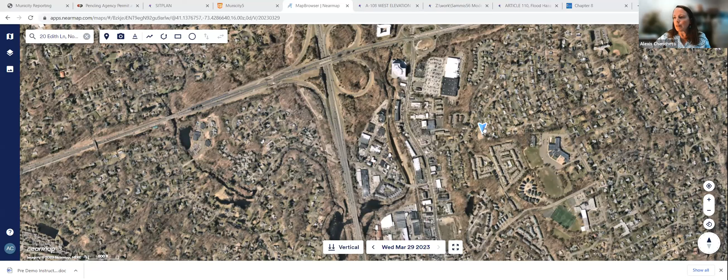I'll just zoom in. So this is the end of Edith Lane at the top of the screen. There is a water course at the bottom of the screen. This is Winnapock condominiums off of Aiken Street. And so this is the property in question here. And the work that they're seeking to correct is in the rear, and it is within the upland review area of the wetland and water course. And with that, I don't know.

So I know that Mr. Pinedo, you're here, and the engineer Wayne Devanzo is here. So if either of you want to describe the proposal, and if you need me to, I can share your submitted site plan to everyone as well. Just let me know.

Mr. Pinedo, would you like me to share? Can I share my screen? I have the drawing. Yes, please do. Can everybody see that? Yes, okay, yes, okay.

So this is the site, and this is the area that had been filled. And if you look closely, you can see there's really 3 contours on there. The reddish contours are the contours that are out there today, and the lighter ones are the pre-existing contours. And then the black ones with the boxes are what's being proposed. So basically this site was filled pretty significantly in this area and down towards the wetlands. And the proposed grading is seeking to cut this back and get it somewhat closer to what was existing. And again, the black lines are the proposed grading.

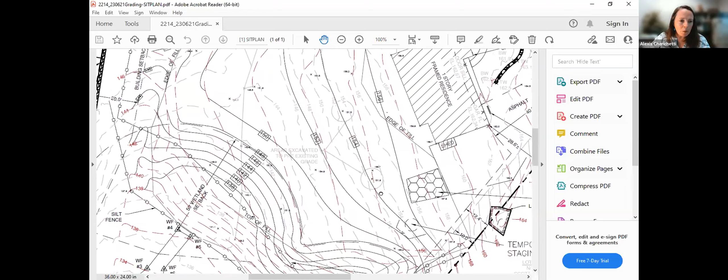Can you just point out the location of the wetlands relative to what you're talking about? Sure. The wetlands are, if you can see the cursor, in this area, and if you can see the flags, the triangles. The grading is in this upper area. And that's the setback, roughly where the steeper section begins.

That's basically it. Sorry, one more time: the gray lines are what would have existed previously. These grayish lines are the original existing grades. These more reddish ones are what's there today. And this is what's proposed.

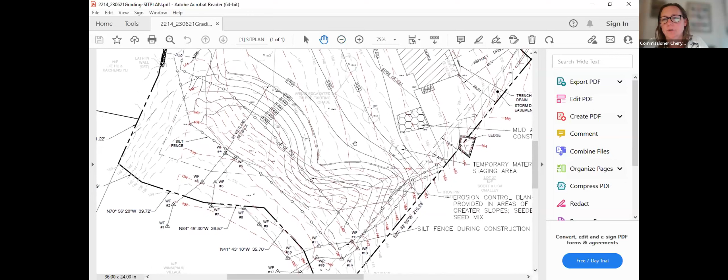So, would you be able to give us a little background? I don't think Commissioner Breslin was here last time this was presented. Were you? I was not. Okay, so I think if we could get a little bit of an overview of how we ended up here, that would be really helpful for the commissioners to remind them and also to introduce the project. Thank you, I appreciate that.

Okay, so maybe I'll go through some photographs real quick. Would that help? And then is that what you're talking about?

I think you might be remembering I did issue an enforcement order, and that triggered the need for a show cause hearing. So I went through quite a few aerial photographs and site photographs of the site, and the agency did uphold that order, which is why the applicant is here today.

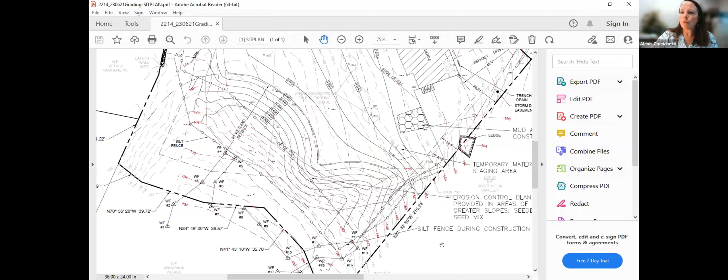But that's okay, if that's... well, it's only me. No, we're good, we'll go quick. Let's see, I'm just thinking about the easiest way to share stuff. If I share this.

Okay, so I'll start with some aerial photographs of the site, and then I'll show you some site photographs so you get a better idea of the lay of the land. As for any application, I strongly recommend you take the time to stop by, knock on the door, announce who you are, and have a look in person, because even the best maps, it's really hard to figure out what's going on without being there.

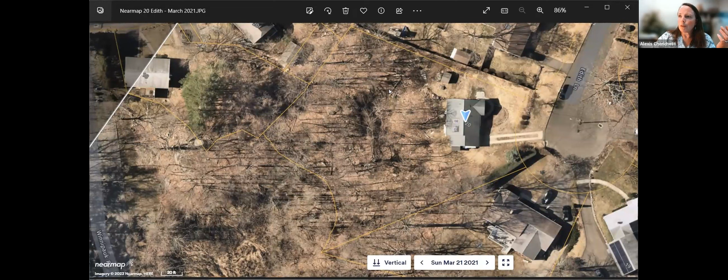This is what it looked like in 2021. It looks more different than it actually was, but there were still some trees and no grading had occurred. Then in the spring of 2022, more trees had been cleared. And this is what it looked like earlier this year, in March 2023, after the area of filling.

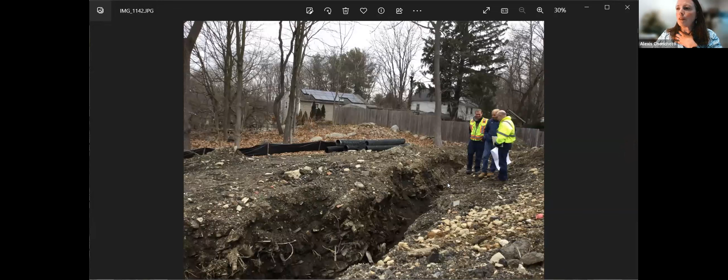This is the trench that you can see the shadow of in the aerial photo. This is the same trench looking down towards the ponded area on the Winnapaw condo property. And then the pink flags are some of the wetland flags, here, here, here, here.

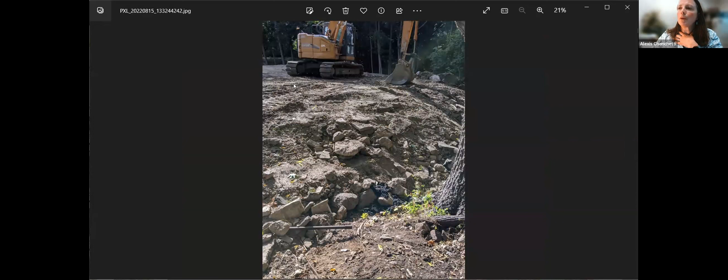Well, let's see, I think I have — so this was during the original notice of violation that was sent. This is the conditions that we found. This is the type of material that's in the fill that was brought in.

Let's see, I have some better photos somewhere. So again, this is the wetland, the ponded area, and on the side of the fill slope.

And so one of the issues is, in addition to needing an inland wetland permit, a fill and excavation permit is also required, and that's administered through our Public Works Department. The fill and excavation permit defines suitable fill versus unsuitable fill.

Unsuitable fill includes stuff like plastic, construction debris, wood, asphalt, and other materials. Let me flip through these. Here's a good one. The house is off the screen to the right, and you can get a feel for the extent of fill material. As I was saying before, a fair amount of the fill material is unsuitable.

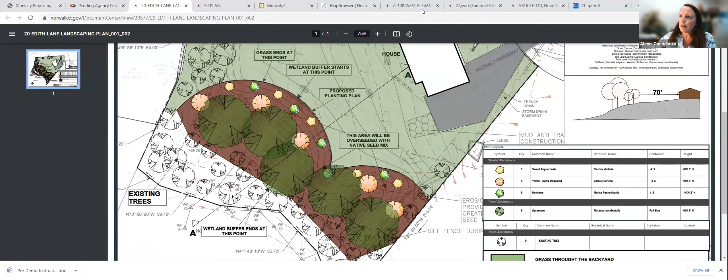I think that's all that I know. Maybe I don't know if Raul or Wayne have any ballpark estimates for the duration, the time it might take to remove the material, and how long it would take if the commission were to approve your application today—which they can't, but as an example—how long would it take to complete all the screening and grading activity you propose, so you could do the planting?

I would guess that might be, with the screening and everything, maybe a 3-week process, possibly.

I have a question just in looking at the grading. If I understand correctly, the grading being proposed—I don't know what the percentage is—so what's the percentage grade being asked to be put into the upland review area? Because that's a significant change from what the grading was existing. I'm just trying to understand. It looks like it goes from 148 to 138, previously it was not as steep in the upland review area.

Yeah, it's right, it's 2-to-1, that's a 2-to-1 slope in that steep area. That's proposed, the 148 to 138. So a 2-to-1 slope, meaning for every 2 feet of horizontal, there'd be a 1 foot increase in grade. Correct, yes, I'm sorry, yes, that's right.

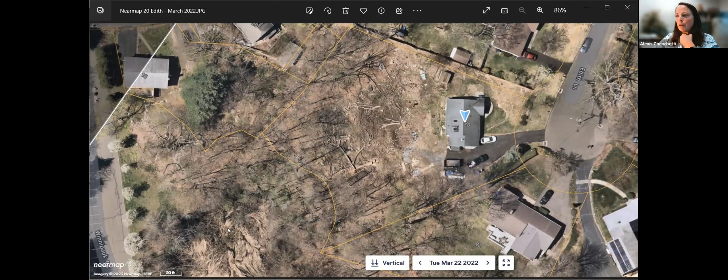But this area is kind of a relatively high point. This whole area here is a bit of a valley. So this point here is higher than here, and it's similar to here, if that makes sense. So there's a valley that runs through the subject property. And then the valley continues with a higher elevation here, but a low point here, and it's in that low point just south of the property where the wetland is.

Did that help at all, by pointing and clicking? In terms of the grading that's proposed, is it still a valley, or how does that relate to the elevations around? So I'll share, because I'm just thinking about how the underground water is going to run.

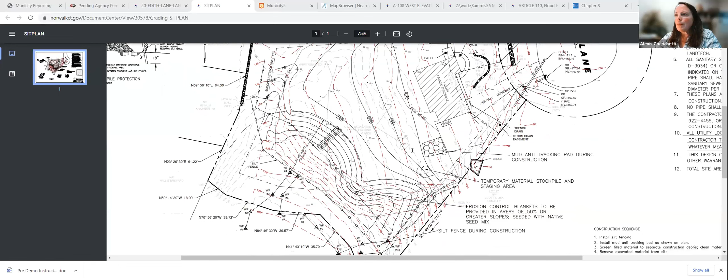Let's see, I have to fit it all on a screen.

If we start with the light gray contour lines, when you have a kind of a V, or this is more of a U, that's a valley. So if you were to walk along this elevation, you wouldn't go up or down, you'd stay at that same elevation. This kind of shape is indicative of a valley, so your valley had been here.

And what is proposed, same concept, this is the proposed contour. A swale is proposed along these contours here. Previously water came down this valley and more or less ended up here. What's proposed in the solid lines is a swale that would capture any water sheet flow coming across the watershed from this direction. Instead of the pipe originally installed, it would travel within this swale that would outlet at approximately the same location.

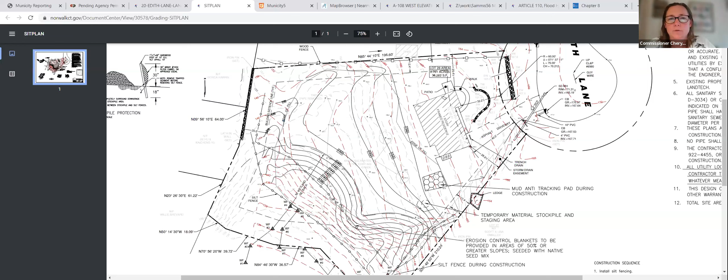Thanks, Alexis. Okay, so I guess I'll speak for myself. I have some concerns about a 2-to-1 slope. I think that if it's kept, we need some reassurance that it's going to be stable and not erode into the wetland, be it with more robust plantings or other means. And I think if it is a 2-to-1 slope, we may need more information from a wetland scientist or somebody who can assess the impact to the wetland. I don't know if anybody else has any other comments about it.

One last thing, for understanding. I'll put in my two cents here. I would like to see the elevations pulled back more, just so we do have more of a gentler slope and get it back to more of the original than what's being proposed. So that's just my thought on that.

Okay, thank you. Commissioner Breslin, were there any other comments? No, I just want to be sure I understand that the watercourse, in summary, is drainage, and that basically ends in that pond—but that's not a pond, correct? Is that the extent of where the water goes? Yeah, it doesn't continue, there's no direct nexus, I hate to use that word, but it does kind of end there. I'm sure there is a headwall structure somewhere in there for an outlet, and then I would assume it goes across Main Avenue and discharges to the Norwalk River. But there's nothing in between, there's nothing adjacent to it. There's no further downslope wetlands or water bodies that are present anymore. Thank you.

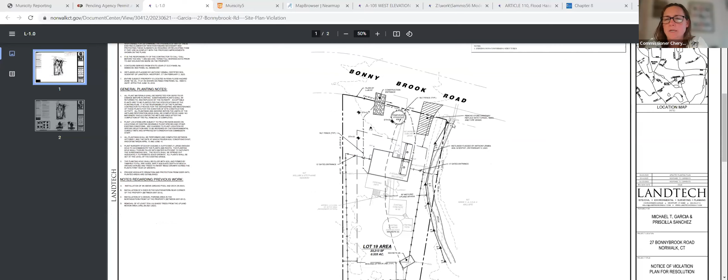Do you think we could see the planting plan again? Mr. Carey, have there been any changes since the last time we saw it? No.

And just for the record, we take no exceptions to any of the comments from Mrs. Cherichetti. We agree, we'll amend the plan as needed to resolve the violation.

So this dashed line is the 50-foot upland review area from the wetland flags. The wetland flags are very proximal to the water course. The water course's 100-foot upland review area encompasses the entire property, so it's not shown. One comment was that the shade trees were fairly removed from the area of tree removal, which was mostly along this area. Being very general, 3 of those - one's already within the 50-foot upland review area - but the other 2 would have to be somewhere within this area, preferably spread out so they provide additional shade to the water course.

And to answer your other question regarding the other shrubs, 5 of the shrubs would be the larger shrubs, the serviceberry, which if left unpruned would not be shade trees, but would be small trees, small multi-stems. I think that was the question earlier. Okay, thank you.

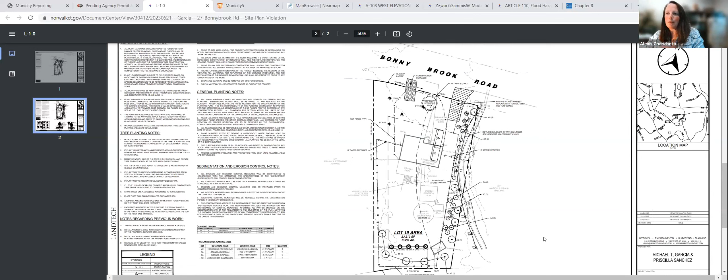Alexis, can we make an amendment to the resolution to increase the trees? Yeah, absolutely. My memo is just guidance, and at the end of the day, any resolution is yours. So as long as conditions are tied back to wetland impacts, then you can amend, modify, limit, or condition any approval. So a few extra shade trees would qualify, it seems like, to shade the stream.

Right. So anyone making a motion would make the motion to adopt the resolution, but with the following modifications, and then just say what you would change. Does anybody want to weigh in on how many trees they would like to see, or would you like to see the applicant come back with a more robust plan of trees?

Well, I think for our own purposes, it would be nice to have it on paper before we accept their resolution, just so we know where they're going. That sounds pretty reasonable.

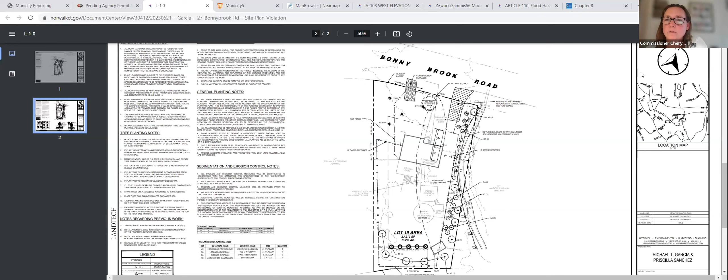All right, well, I guess I should ask, does anybody want to put forward the resolution? It seems like we probably don't want to, but just want to make sure that there's nobody who just wants to amend it as it is. So Mr. Carey, I think we need some more trees.

Just from a logistical standpoint, I will say, as a licensed arborist and professional wetland scientist, the site is going to get pretty tight with the size of the trees from a maturity standpoint. So while you might have some mortality by adding more trees, if they were to die, they'd be removed. If you were to put 10 large-type maple trees and they were to all grow to full maturity, you'd be looking at a crowding situation based on the plan that was presented.

The spacing of the trees already is within 15 feet of each other, so at full maturity they will be growing into each other. I just wanted to put that out there. So while we don't have a problem adding more trees, you are going to be looking at a spacing issue going forward. That's kind of why we placed the amount of riparian plantings in the buffer area as much as we did.

We do understand the sensitivity of the riparian area and trying to protect that, and also provide some radiant cooling to the adjacent stream course. So there's no problem adding a couple more trees on that side, but to try to accommodate what was previously there - which, from what the applicant, or the former applicant, has told me, was a lot of dead tulip trees he was advised to take down by his arborist at the time. So that's what I've been told. I have no problem amending the plan, I just wanted to let you know of the possible logistics of adding that many more trees in that density of an area.

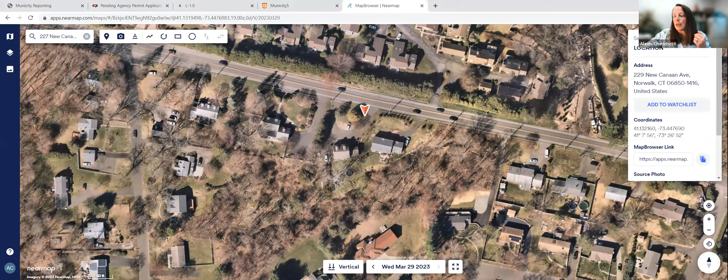The short story is that it looks okay-ish. So this is the new house here, this is the wetland corridor, this is Orchard Lake condos to get your bearing, and the Merritt is just off the screen this way. This is New Canaan Avenue. They did a boulder demarcation wall where everything on this side was supposed to be buffer, and then these are buffer boulders as well.

The inspectors found 38 shrubs, I believe, so that's close to an 83% survival rate, which is actually remarkably pretty good for the length of time that the plantings have been there. They did find a lot of non-native invasive plants, so that's always a tough management issue. And I can show you some site photos.

Was invasive plant management part of the permit? Unfortunately, it was not. So I think that the non-natives invaded during the project. So we don't have a clear requirement for management.

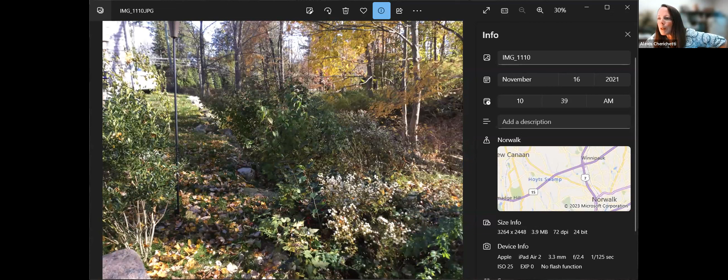Back to Catherine's, was it dirt? No, the intent was that area was undisturbed with the development, and they were supposed to enhance it with additional shrubs. They did bring in fill to make this grade, and I don't know if that's where a lot of the weed seed came in. But they had some vine growth starting in November 2021.

That's kind of the character of it. This is again still in November.

Okay, does anyone want to make a motion to release the bond, or does anybody want to discuss this anymore? It looks like the buffer is effective, the stones, and they did do the planting per the permit, so I feel like, even though it may not be exactly what we would want to see, it might be something to release at this point. They're not going to be disturbing the wetland, most likely, based on that wall that they have there.

I guess I'll make a motion to release the bond for S16-488 for 227 New Canaan Ave. Do I have a second? Seconded. Any discussion? Okay, all in favor? Aye.

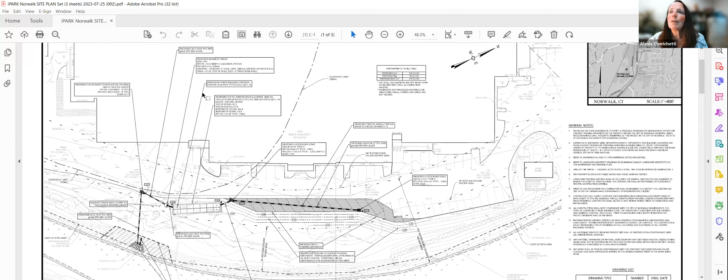So they are proposing, just adjacent to the parking area in this kind of berm adjacent to the river, a Cultec unit, and I believe an oil separator, and a manhole. So the only thing that is, in addition to the parking, which is pretty clear cut, and you can see today the pipes here and here are already existing, but this Cultec unit would be also proposed.

So my question is, are you comfortable with this being a corrective action minor permit, which is a staff approved permit? Or since you've already in part discussed the violation, is this an application that you would like to see in front of you? Do you feel it warrants more than a minor permit?

Again, what the activities would be: the expansion of the parking lot here, the minor grading adjacent to the parking, and then the excavation of this area to install a detention system within this area here. The catch basin is existing, and there is a pipe that comes all the way across to this catch basin and then out.

And so this is already there, is my understanding, but this would be new. So the parking is already in place? Yes, this is a corrective action application. The parking was installed—I'd have to look at my notice of violation—but I think it was installed about two years ago during the pandemic.

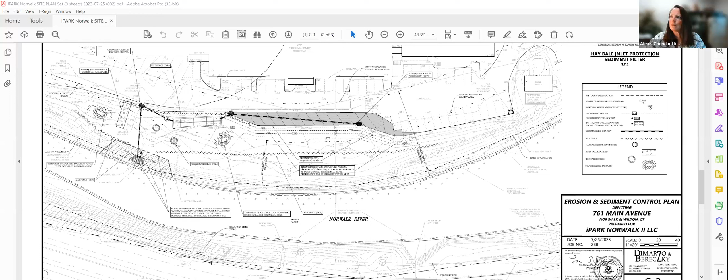So on the landscaping plan, they make the trees look huge, but then on the engineering plan they make them look small, which is funny. But they are proposing - these are those 2 existing trees that are shown on the landscape plan, and they are proposing tree protection for those.

So they weren't proposing any new trees in the vicinity of the Cultec. Those are existing trees that are on the engineering plan, more accurately located, I'd say, than on the landscaping plan.

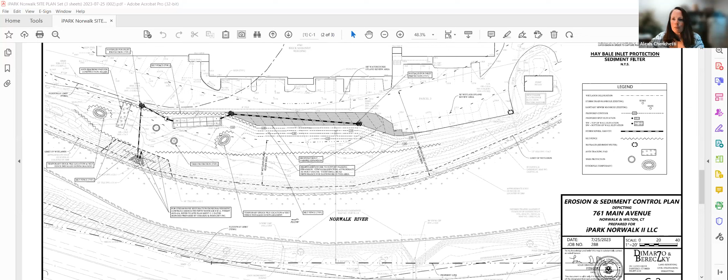You know, these plantings - so for this one, I don't know if I necessarily would include any additional trees up above. So that might be something if anyone feels strongly about adding more trees, then it should probably go back to you.

Anyone? It's a decent planting plan down there.

I think I would be fine with it being a minor permit. I would go with the minor permit too at this point.

Yeah, I mean, when you look at where the actual existing is versus the landscape plan, it doesn't look like it's going to impact the landscape plan as approved. Right.

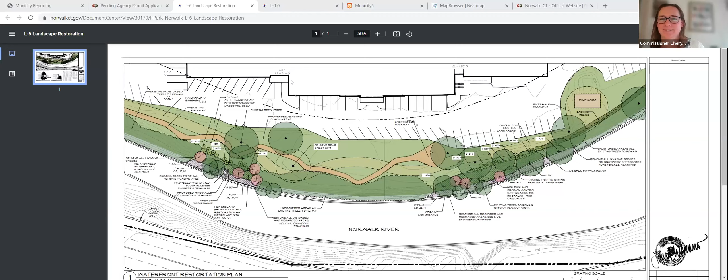All right, so I guess we move on to conservation initiatives. And does that include the zoning that we were looking at? Is that under that header? Yes. Okay, so I did a little research on trees and the requirements with the new zoning.

That was my task. I still feel like I need to do a little more because I didn't totally digest everything, but from what I could tell, there are some zoning requirements on street fronts, but it depends upon the zone, and it doesn't seem to include all the zones, and I'm not totally sure why. And there do seem to be requirements for parking lots as well that seem fairly robust, and a requirement that the trees planted are native trees, native to Connecticut specifically.

So they do seem to cover a lot of bases, but some questions that I came up with while I was doing it, and I just need some more time, is why there aren't requirements for street trees for certain districts like the hospital district, the general urban district. I mean, they have it for the general urban corridor district and the general urban water district, but I don't really understand why it wouldn't cover all commercial buildings and things like that. So it may just be that I didn't dig into the zoning as much.